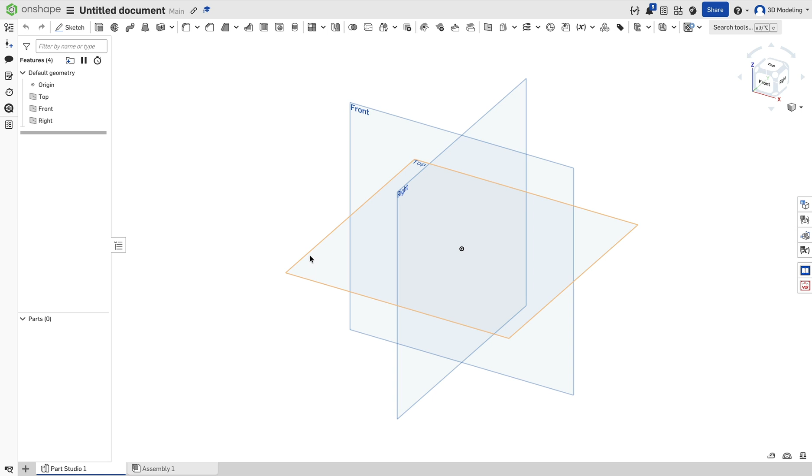Let's begin. First select the top plane and create the sketch. Now let's make the hexagon base with 6 sides, so double click it. Now use this tool to make this point and this line attach, and let's set its dimensions to 3 inches.

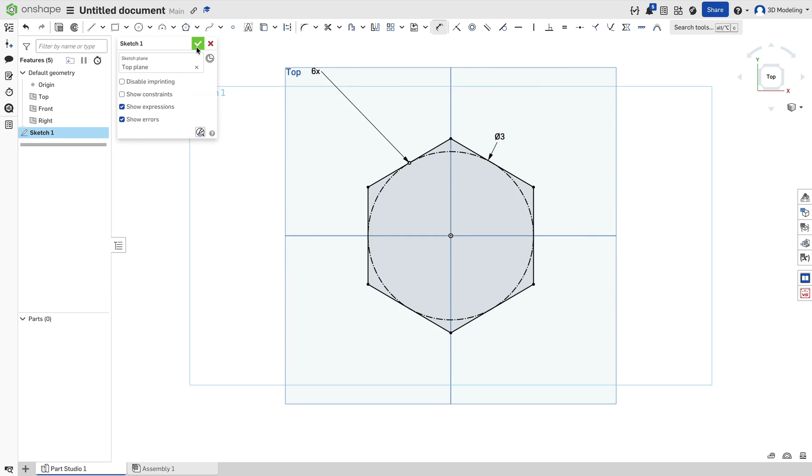Great. Now click on the top plane and create the offset plane by 1 inch. Click OK. And let's copy the sketch. Double click, copy sketch. Select the new plane, paste sketch.

Now let's go ahead and shift it. We will shift it by 0.25 inches to one side and to the other. Great. Now let's also rotate it by 45 degrees, and to do this we can just make this line horizontal. Command Z, horizontal. Great. Click OK. Now we have those two sketches offset.

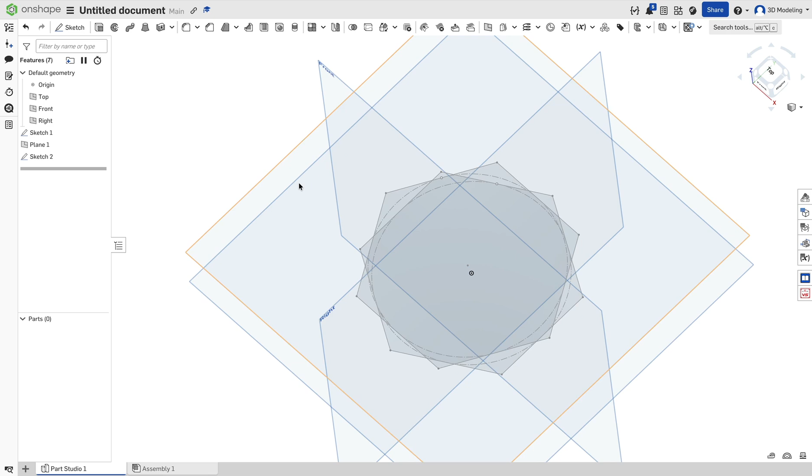Again, let's pick this plane, create a new plane. Let's go 1 inch to the top. Click OK. Select the plane, paste the sketch.

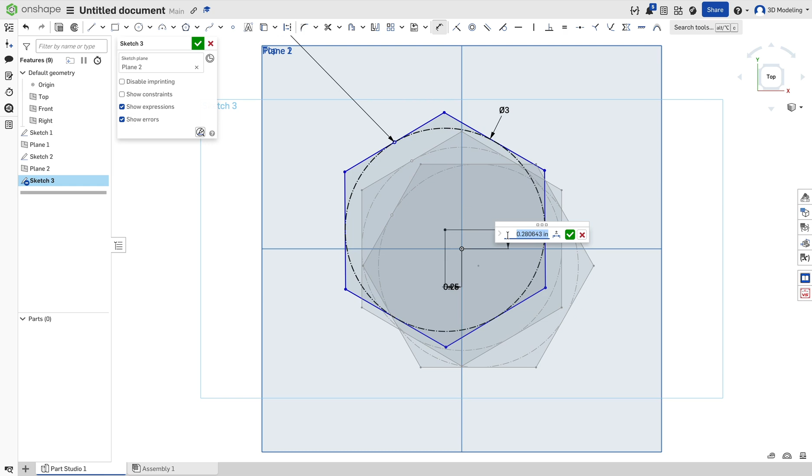Now let's edit the sketch again, but this time we will move it this way by 1/4 inch up and to the left. Awesome. But let's not forget making it completely vertical. So let's use the vertical tool to align this side to be vertical. Great. Click OK.

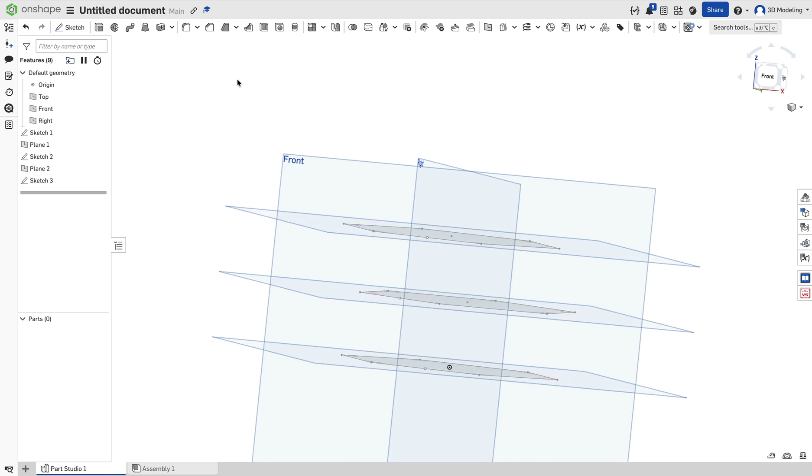Now again, another plane up by 1 inch. And let's copy, paste, and now let's paste the sketch in. Paste the sketch. And let's make this sketch as our last sketch concentric. And let's shift the side again. Great.

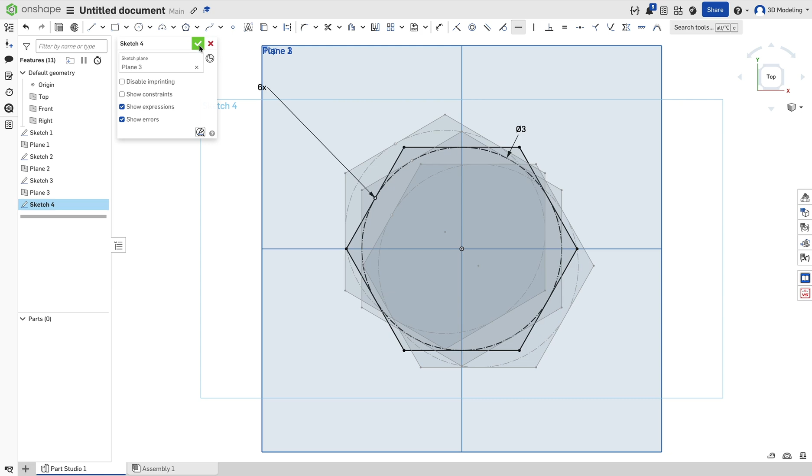Now what we will do, we will use another tool. Here it is, bridging curve, where we'll connect every single point and create the new lines. Don't forget to unhide the sketches back and repeat the process.

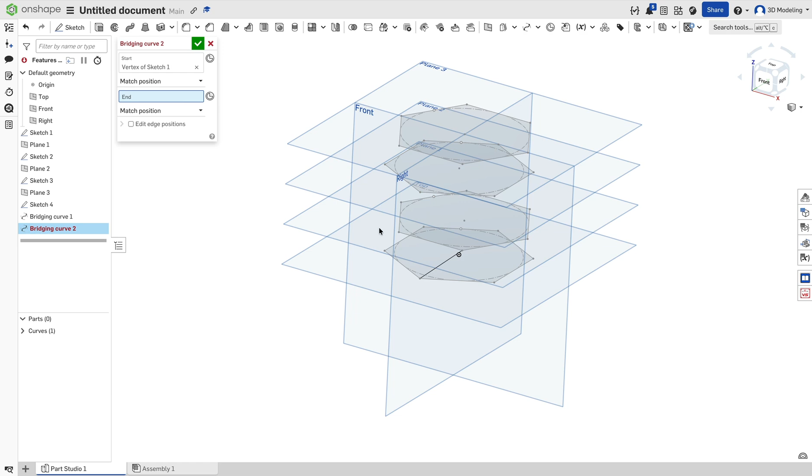Here we go. Now we had completed the skeleton of our base. Let's hide the planes so they don't obstruct our view.

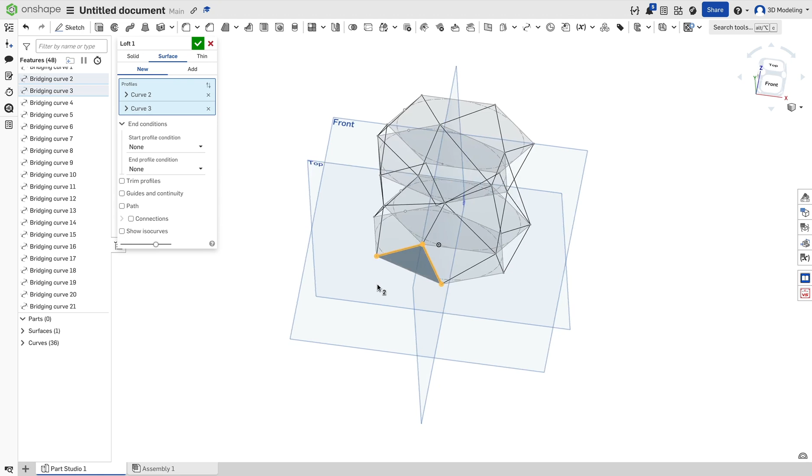Now we will use this Loft tool, and we will use this tool to select two lines, and it will create the plane between them. Now click OK, and we will repeat this process. Now, sometimes this Loft might fail, and it's okay. Instead of it, just create a new one and later go back in and change it to add. It's just that sometimes Onshape is glitching. But for now it's all working, so let's continue.

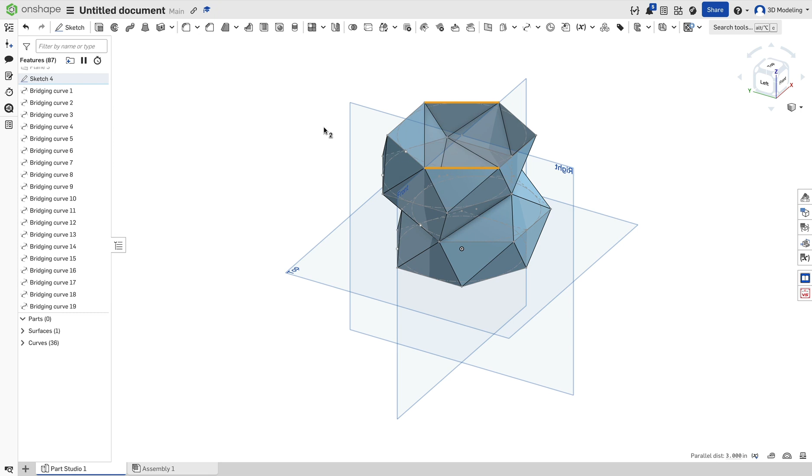As you can see, I selected in two parts and slowly just build it from here, because you cannot just select all of those lines at once. Here we go. Give it a second and it will form the solid part.

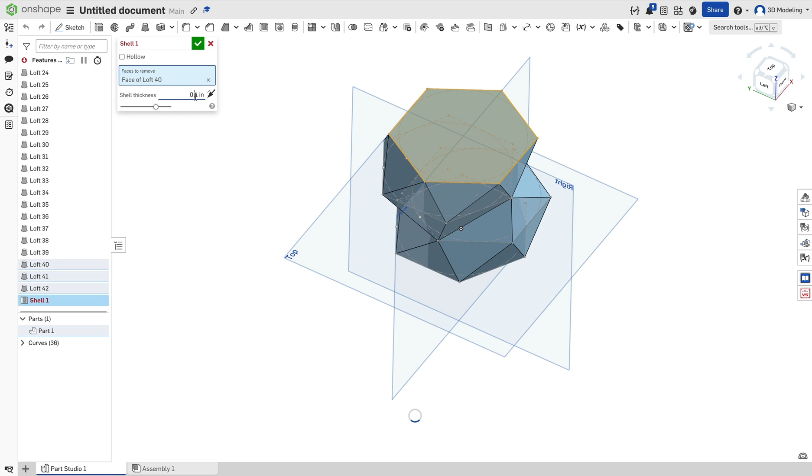Now we just need to use the shell tool, and it will create the walls of thickness of 0.1 inch. We will change it to 0.2 and click OK. Now we have our hollowed out plant pot.